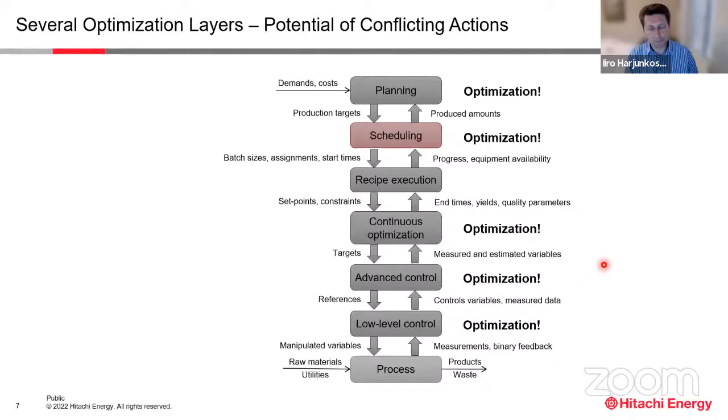At the same breath, I want to acknowledge my PhD advisor, Tapio Westerlund, from Åbo Akademi, who brought me to the world of optimization and always inspired me to try to solve more difficult problems, as well as Professor Ignacio Grossmann, who brought me really into this scheduling business and gave me more network by working with him.

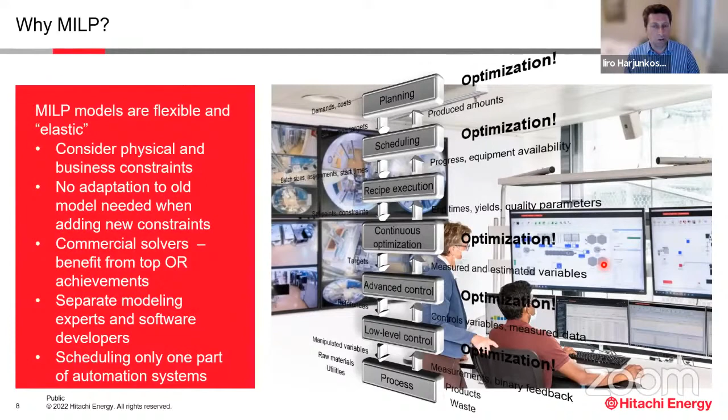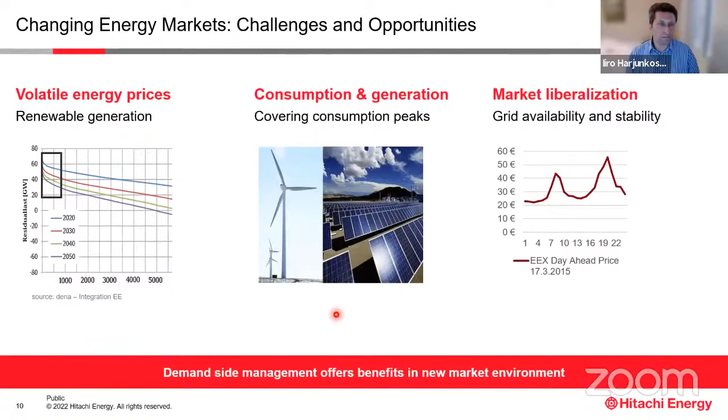So the goal of my talk will be, first of all, to highlight the importance of energy and electricity in this business, but also to give some insights into solving industrial scale scheduling problems, at least trying to solve them. I'm going to focus on demand side management, which combines process scheduling with energy and electricity scheduling. I'm going to present some strategies for speeding up large-scale optimization problems typically seen there. Then I want to share some of my personal experiences from the work I've done on melt shop scheduling and solving the unit commitment problem. One of my own beliefs is that MILP is a really important component in solving industrial scheduling problems. It's not alone sufficient, but it is one of the main topics.

So the outline of my talk will be as follows. I will first discuss why MILP. Then I will give a very short introduction on demand side management. Then we jump into the first problem, which is the steel plant scheduling problem, a continuous time formulation. Then we talk about the unit commitment problem, which is a discrete time formulation. And then I conclude.

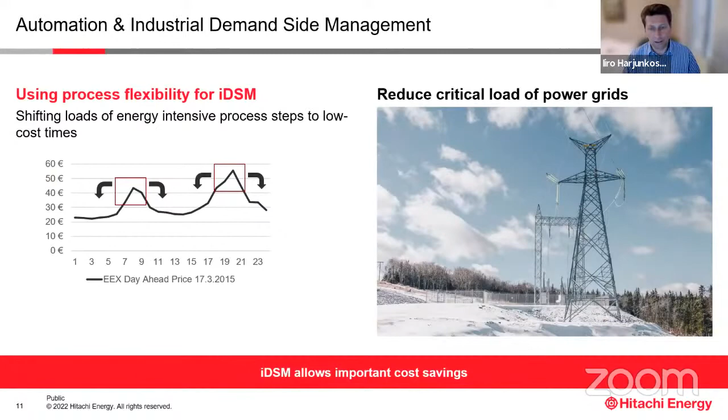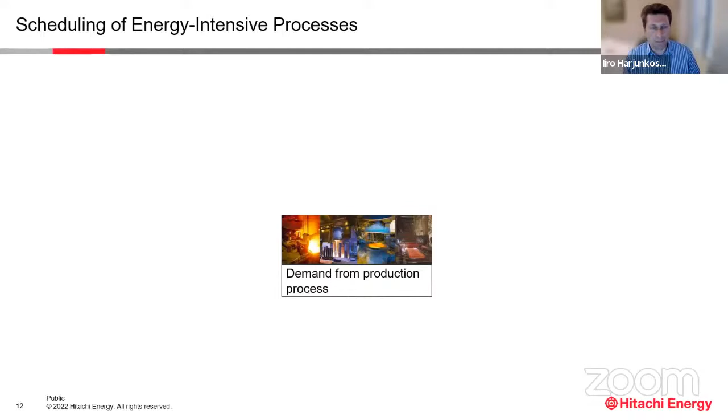So let's look at the why MIP. For instance, in this seminar series, or if you read scientific papers, we see a lot of different and excellent scheduling algorithms that could be efficiently applied to many problems. There are various policy methods, graph-based methods, TSP-based methods, constraint programming, genetic algorithms, different heuristics, approximation algorithms, and AI-based methods, and so on. So it's of course natural to question, why would we choose something like MILP, which is NP hard?

However, I'm actually in a very good position because Christian Artigues gave, a month ago, an excellent speech about MILP and scheduling. I would say he gave truly a very systematic overview with also some analytical approaches. So I'm not going to focus that much on analyzing the problems. I'm just trying to be the solver, the engineer that tries to solve tricky problems.

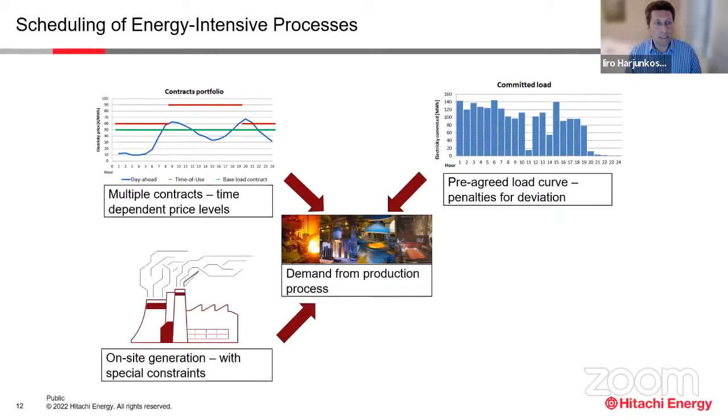Another thing is why MILP: when you look at automation systems in industries, the scheduling is only one part of it. You have the scheduling in this big chain of decision making, and a lot of these are actually using optimization. In industrial automation systems, we also have to be compatible with different layers, so we have to create compatibility at least between the neighboring sections. In this way, I would say mathematical programming is a very good way of systematizing this task of coordination.

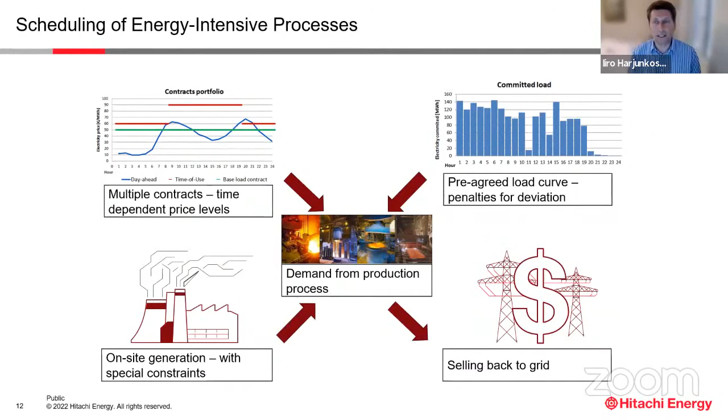Another way to see it is that MILP models are flexible and elastic. What I mean by flexible is that you can consider physical and business constraints that can be very different. Of course they have to be linear if you want to use MILP, but most of them can be linearized and at least approximated sufficiently well, and then you don't need to adapt the model. If you have an old model that is well formulated and you add new constraints, you can actually add it, and this flexibility or elasticity comes from that.

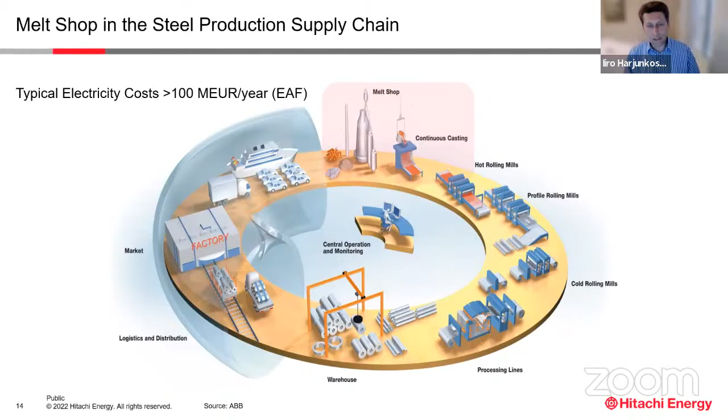Another thing that is needless to say: if you use commercial MILP solvers, you really benefit from top achievements from operations research and the best algorithms available. And with commercial solvers, you can actually also rely on them, and you can put part of the reliability and liability, as an industrial solution, on the ones who provide the solvers.

Another thing from the industrial point of view is that you can also separate the modeling expert and the software development from each other. So you can really have people who know the process and focus on the modeling, and other people who are doing software development, programming, interfaces and graphical user interfaces and these kind of things. And of course, as you see in the picture, scheduling is only one part of a big automation system. So that's another topic here.

However, in this talk, I will put on my engineering hat. I will show some cases where a concrete industrial problem is turned into math models. My focus will not go too much into how you really go about solving this. I will talk a bit about the formulation, and then I will also talk about how we go about when we have very large scale problems.

So with this, let me move to the first topic that a bit sets the stage for the industrial case: demand-side management. I will give you a very short introduction. This is a topic I have been working on myself since 2008, more or less, so it's 15 years anniversary soon. This is basically a consequence of energy supply becoming much more limited and variable once you have more renewable energy sources. This also means that when you increase the renewable generation, the prices of electricity become more volatile. You have this market liberalization that has also created a very volatile market. And that means, if you can handle it, large industrial consumers may really benefit from utilizing the flexibility they might have in their energy demand.

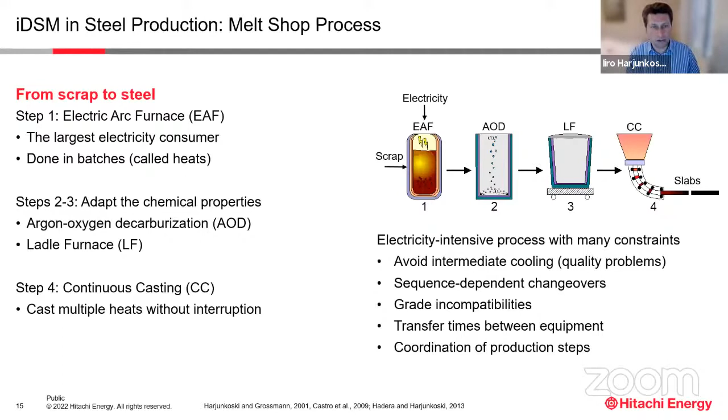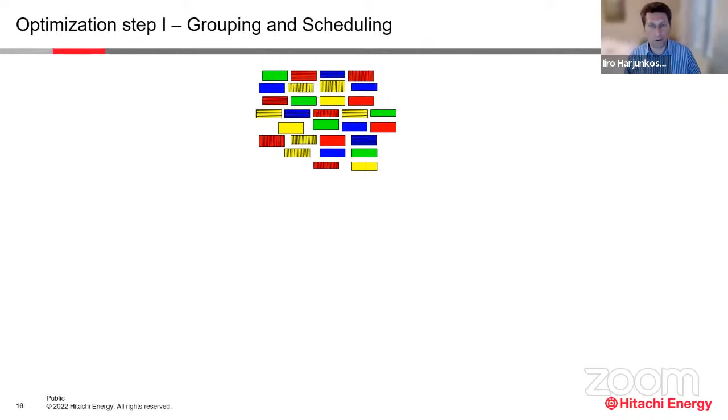And the idea is to then consume during cheaper periods. I'm going to focus more on this scenario in this talk.

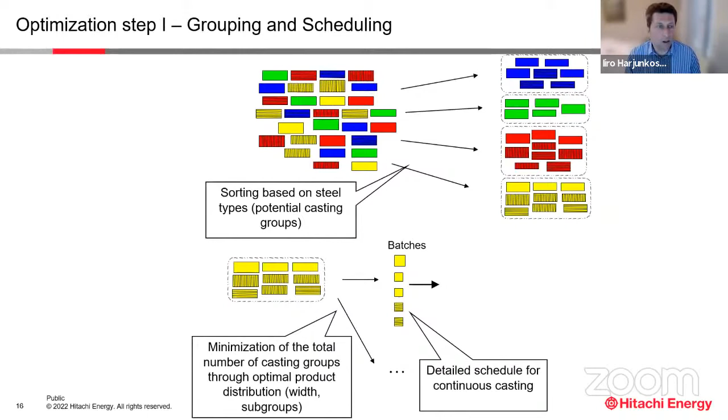Take any process that consumes a lot of energy. These energy intensive processes first have to buy their electricity from somewhere, typically through multiple contracts. Earlier, there was always this kind of base load contract done for maybe one year. Then you had time of use contracts, like night tariffs, day tariffs, weekend tariffs, but these are getting less and less common. Market liberalization has caused day-ahead markets with huge fluctuations to take over main electricity purchasing.

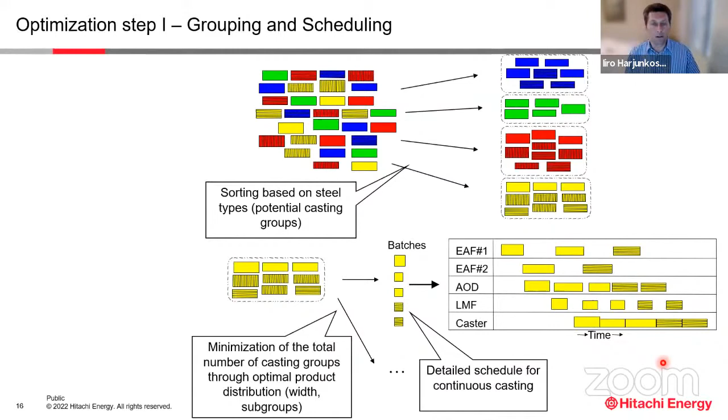So what somebody has to do is create your schedule, and then you have to guess what the price will be for the next 24 hours. You provide your electricity need and make bids, saying I will need this much energy during the next 24 hours. You try to purchase it in the best way. Once confirmed, you have a commitment, a committed load, and if you deviate from it, you have to pay penalties.

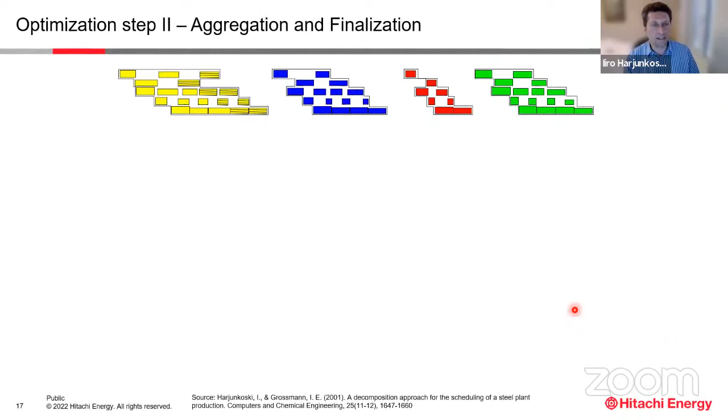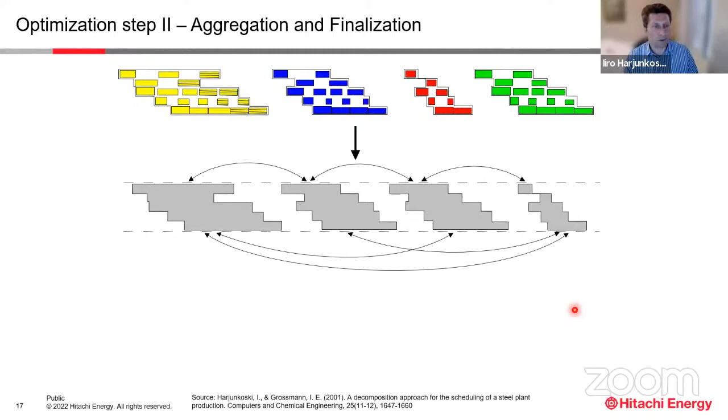There's also on-site generation. Some plants have it, not everybody, which has its own constraints you have to take into account. If you have too much energy, for instance you deviate from your plan in a negative way, it may be that you can even sell it back to the grid. But this gets a bit more tricky.

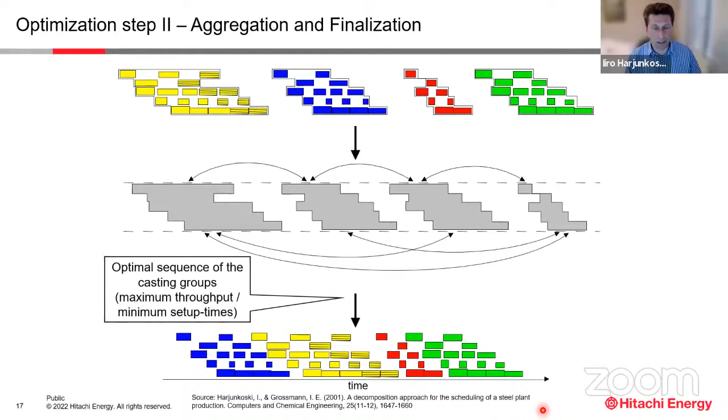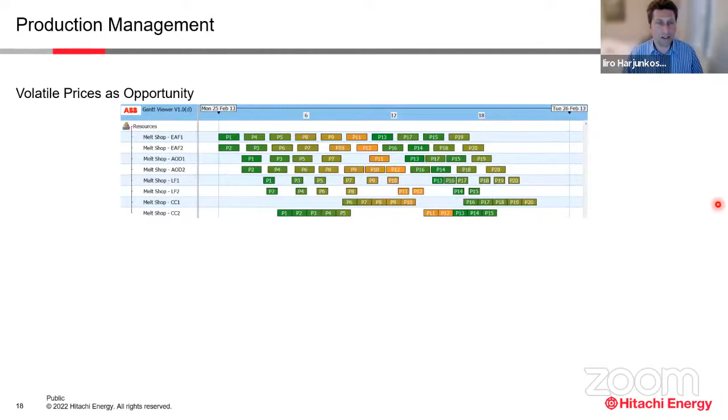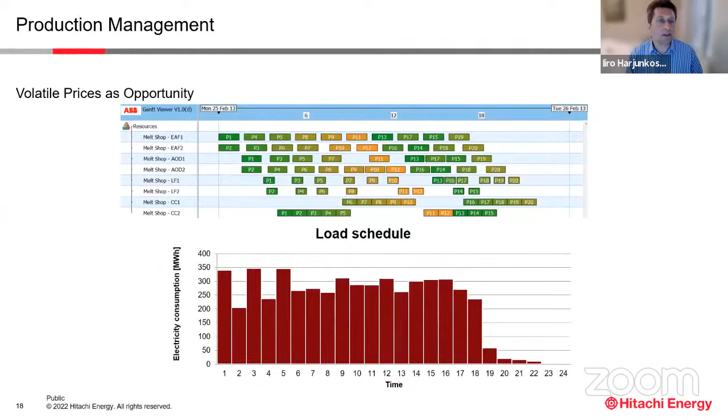The focus in this talk will be on this melt shop, where we melt scrap and iron ore to produce steel, which we then cast in a continuous casting unit and further refine into different products. Now let's look at the process in a bit more detail.

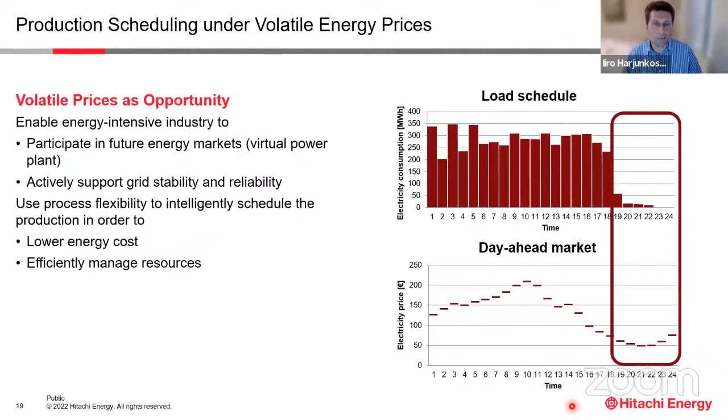The first step is to smelt or melt the scrap you get. It's done in an electric arc furnace, and this is a huge consumer, typically consuming between 70 to 150 megawatts. It's the largest electricity consumer in these kinds of steel plants. This is done in batches: you fill it with scrap a couple of times, then run the electrodes to melt the scrap. Once done, you have a full set, maybe 100 tons or more of molten metal, which you hand over to the next step, the argon oxygen decarburization unit.

We blow in a mixture of argon and oxygen to get rid of the carbon, and this produces steel. The third phase, the batch goes over to the ladle furnace. In this step, you typically add some chemistry, some chemicals, to create a certain steel grade, like chromium for instance. Then you adjust the temperature so it's perfect for the next step, which is critical: continuous casting.

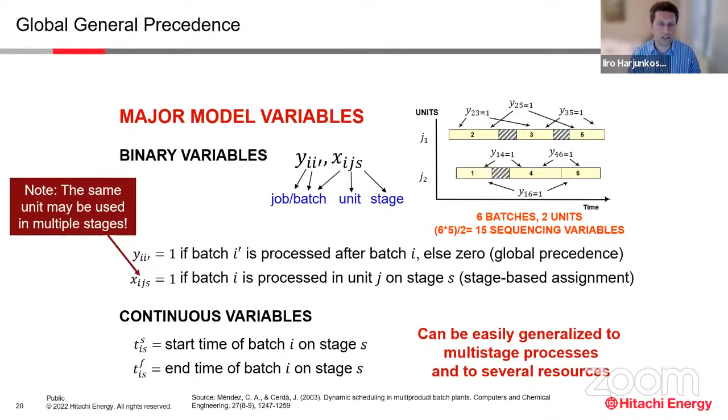It's called continuous casting because it should cast multiple heats or batches, called heats in the steel world, without interruption. That means when my previous batch is slowly emptying, you should already have the next batch ready to pour into this tundish so the continuous caster never goes dry, otherwise you have a lot of maintenance to do.

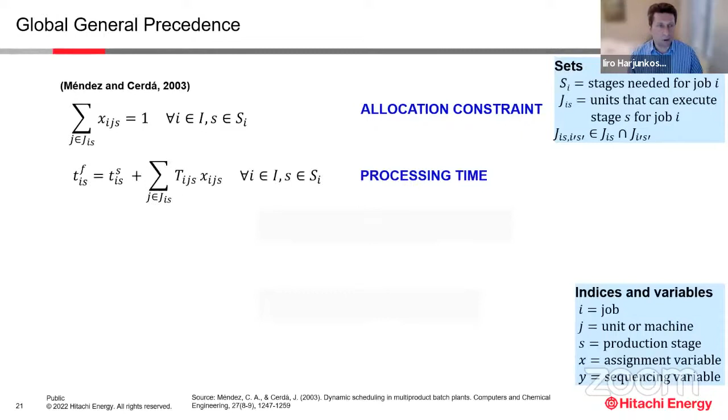So this is the process, and it's an electricity intensive process with many, many constraints. For instance, one constraint is you should avoid intermediate cooling - if a heat stays too long between stations, it can cool down, causing crystallization and quality problems. You also have a lot of sequence dependencies in these changeovers, and grading compatibility requirements.

Some grades simply cannot be put into the same continuous casting sequence. You also have transfer times between equipment that depend a lot on your layout and assignments of equipment, and then the normal coordination of production steps as in any scheduling problem. So how do we solve this problem?

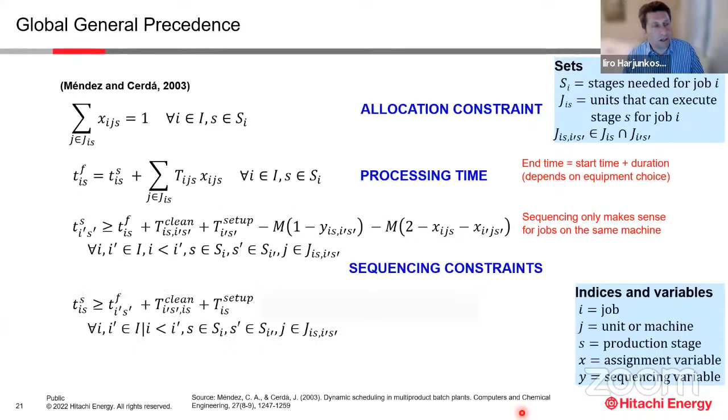It's quite complex. This was something I did with Professor Grossmann back in 2000 during my postdoc. We made an algorithm where you have different steel grades. Here a color represents a grade, and the dashes represent a subgrade, meaning it has similar characteristics and can be cast together, but there are rules about the order sequence. You can also see different widths of these boxes, meaning you're casting different slab types, where geometry also plays a role.

So the first step is simply sorting. First, take them out and sort them so you have potentially compatible grades together, and these grades from one of these groups could form a potential casting sequence.

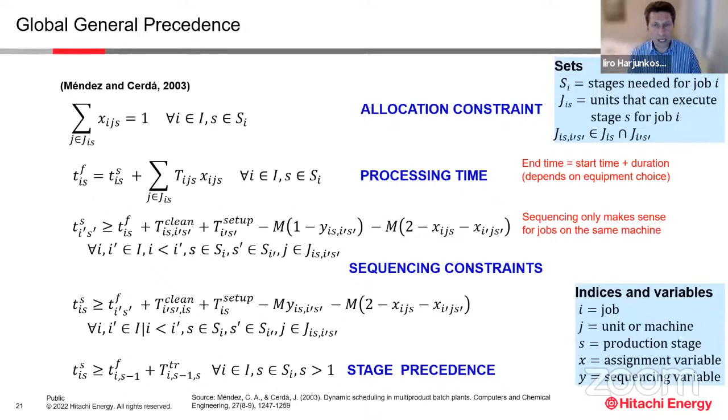Then you solve a first MILP problem. You take each of these groups and solve an MILP problem where you try to minimize the number of casting sequences needed to process all of these. There's also an upper limit for how many heats or batches you can do in a sequence, which varies between 3 and 8, typically depending on the steel grade.

After formulating the sequence with this first MILP problem, you do the standard continuous time scheduling formulation with fixed sequencing. Here the continuous casting is respected in the schedule, and all the other operations are aligned so the next heat is always ready by the time the earlier heat has been cast. The ladle furnace here actually acts as a buffer to keep it warm for some time.

So what you get are partial schedules, and a lot of them. Typically for a week you may have 80 to 100 heats, so you get many of these schedules done. Then you need to think about how to put these together. So you have another MILP problem trying to figure out the perfect order of these, using a kind of slot-based approach.

Finally, once you define it, you can solve an LP relaxation to get the air out and make it a bit more tight, or you can also use MILP to possibly change some assignments to get a more tight schedule.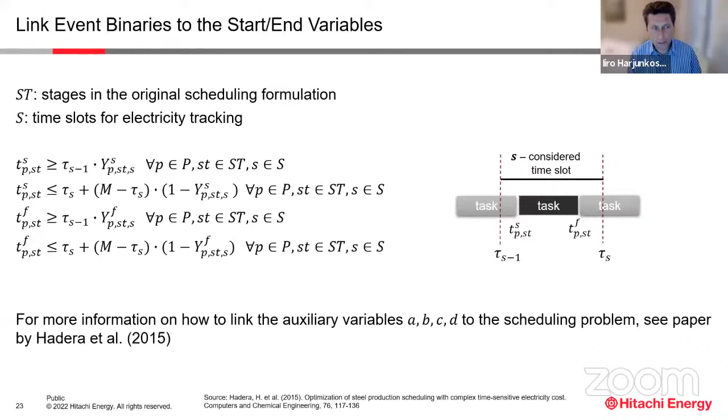If you can actually take into account this electricity price, that should give you a good opportunity. Since this is a continuous time problem, we decided to use a global general precedence as a starting point. This is a scheduling MILP formulation by Méndez and Cerdá from 2003. Basically what they do is have separated binary sequencing variables Y, and this is global, applying for all instances of batch I and I prime.

So if batch I comes before I prime, we have an assignment variable which tells us in which unit J my batch I should be processed at stage S. We include the stage S for generality, because in some cases the unit may be used in multiple stages. Then you have two continuous variables: one is the starting time of a batch on a stage, and the second is the finish time of the batch at that stage. So this is a quite general approach.

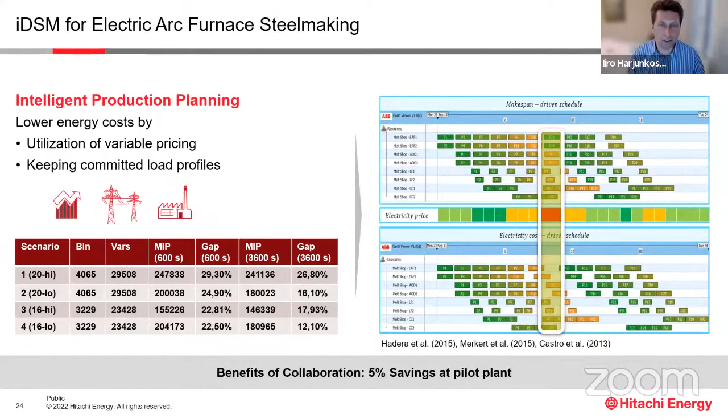This duration could also be a variable, and that was one criteria here, because in the steel example we needed to handle a variable processing time for some units, for instance a ladle furnace, to make sure we can keep it there longer if it has to wait for the casting.

Then we have sequencing variables and sequencing constraints involving the starting time. If I comes before I prime, we say that the starting time of I prime is after the finishing time of I, plus the cleaning and setup times. And since we're talking about scheduling, we have to add this kind of big-M constraints, or use another way to formulate it.

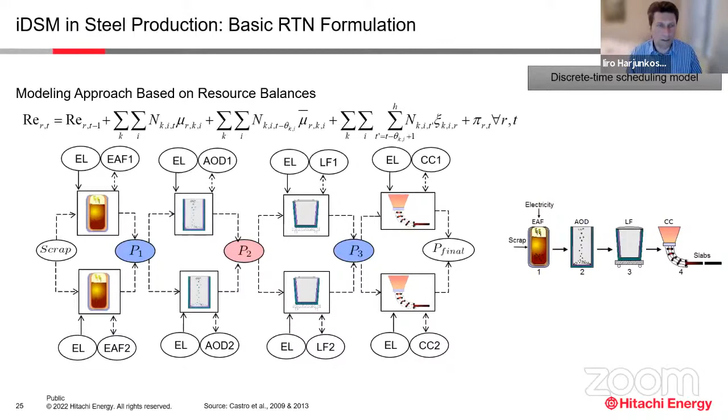First, we relax it if the sequencing variable is true and active, but also if I and I prime are not assigned to the same equipment, it doesn't make sense to make this constraint active. Then, the same way but the other way around, if I prime comes before I, we have the same constraint, just reversed. Finally, we have a transfer time considered between stages.

So for stage precedence, we have to say that the previous stage has to finish, plus a certain transfer time, before the next stage can begin. This transfer time can also heavily depend on the unit assignment you've selected. So that's basically just a simplified plain formulation.

One part now is how we get this energy awareness put into the formulation. There are alternative formulations, but somehow you have to be able to account for the electricity consumption. So our math model basically becomes: production scheduling constraints, plus energy awareness constraints, which I will discuss here.

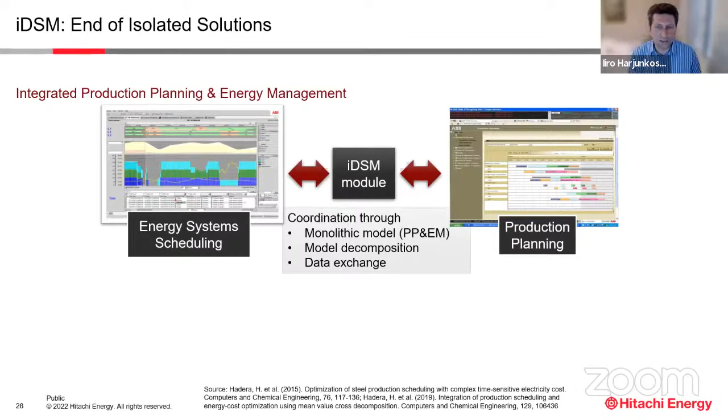You also may have price response, and you have to be able to, in the objective function, understand the penalties for pricing and deviations from committed loads.

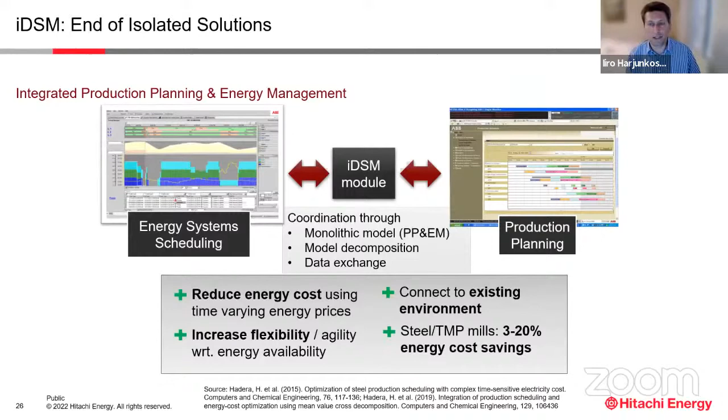Here's an electricity price for this time slot. Then we have time slot 2 with a different price, E2. And time slot 3 has yet a different price.

Now we have to understand how to track this consumption, and the paper by Nolde and Morari from 2010 had this very good idea of tracking it using, I think, 4 or 6 binary variables. So you can calculate that if, for instance, a task starts and finishes within a time slot, then the consumption within that time slot is equal to the duration of the task, and so on.

I won't have time to go through all of this, but to combine these time slots we need some kind of event binaries. So what we did is define two binary variables which basically indicate whether my batch is starting or finishing in a given time slot.

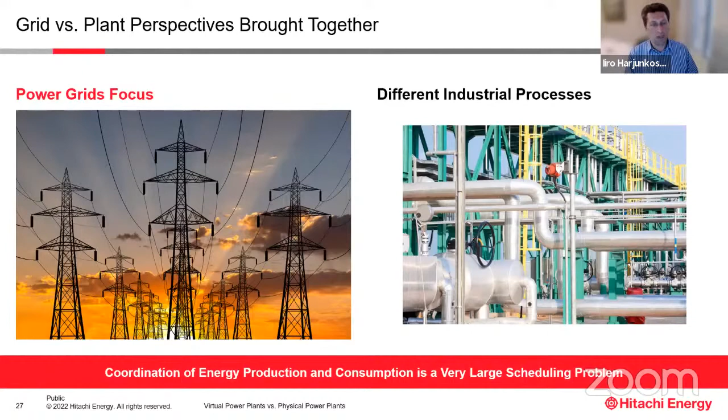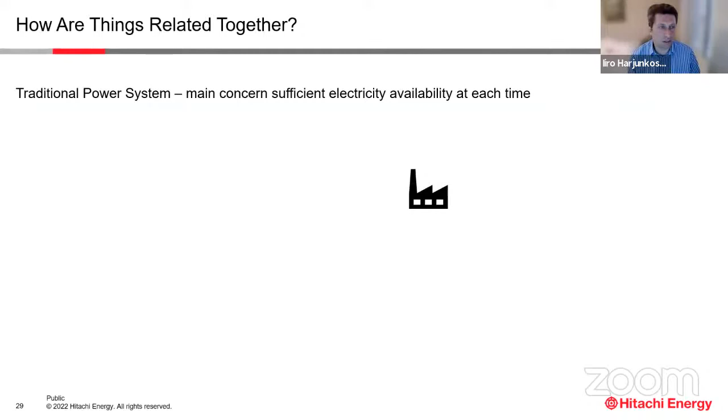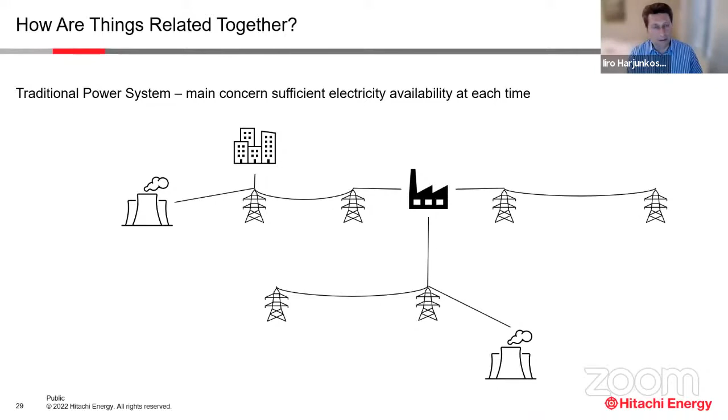This is the start time of a stage in the process in the previous scheduling model, and then you have the start and end time of your electricity slots. This is basically a simplified version, and more details can be found in the publication of Hadera et al. from 2015. This is the way we could formulate the problem. I realized there's probably a lot that could be made much tighter, for instance using convex hull reformulations, but already this one turned out to be working.

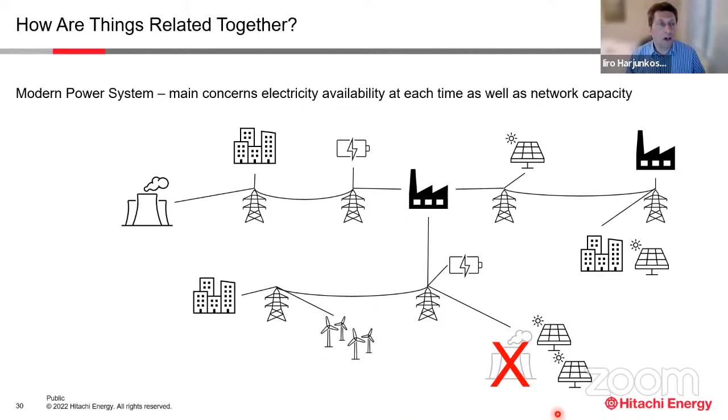So in this case, you can see some results. We took 20 heats and 16 heats in different scenarios. Here we have high prices, here we have low prices, and we get 4,000, 3,000 binary variables, and this is what you get. You can see there's an integer gap of about 20% after 10 minutes of scheduling time, and even after 1 hour of scheduling time, we couldn't reach even close to 0 gap. However, the solution is not far from optimal, but we cannot prove optimality, even if it were the optimal solution, and this still remains a challenge.

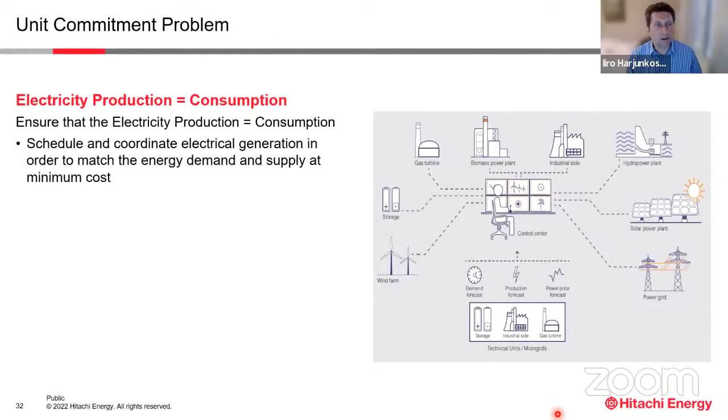However, one of the main targets of this study was to prove whether there exists such flexibility in this process that could be used for demand-side management. Here in the middle of this Gantt chart you have the electricity price - red is expensive, green is cheaper. Compared to the original make-span-driven schedule up here, in the electricity cost-driven schedule you can see that we avoid using the highest intensive cost times for our electric arc furnaces, which are the biggest consumers. We could actually see that collaborative models could save 5% at a pilot plant.

So you can see it's not perfect. We also tried different approaches - we looked into the resource task network approach, both continuous time and discrete time approaches. But as the changeovers here play a really big role, this was difficult because that needs additional tasks, and equipment selection also affects the duration and transportation distances. So that was one thing that spoke against the discrete time model.

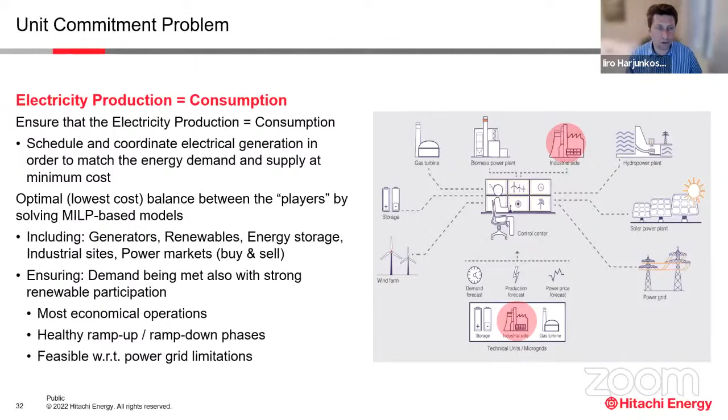In practice, when we talked to the steel plant, they need maximum 5-minute time granularity. So we have to have at least 5-minute exactness, which would make a discrete time approach very, very big. So even though we could prove the discrete time model was actually more efficient, it wasn't that practical. It could solve certain problems, but in this case it was not so good for this problem. However, for some continuous problems, we could show there were a lot of benefits to using this RTN approach.

So then we also tried more - what else could we do? This was not yet sufficient. We could see a clear trade-off between the two partly contradictory goals of minimizing energy cost and minimizing the make span. So we thought, could you actually make some kind of industrial demand side management module? We tried some bi-level heuristics that try to balance between the two targets. We also developed some mean value cross decomposition approaches using Benders and Dantzig-Wolfe decomposition. Here you have the papers.

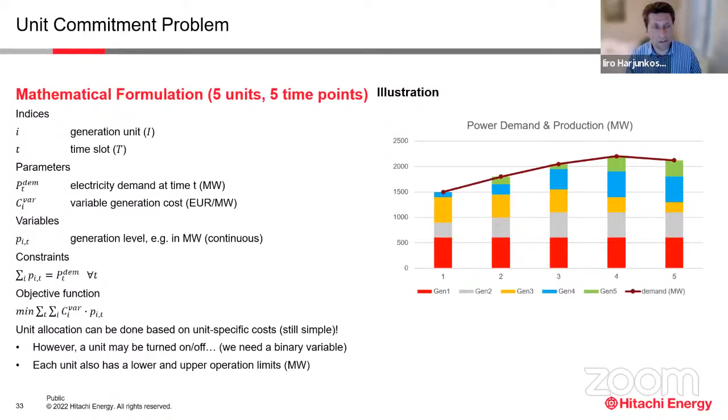We also looked into game theory to try to find good solutions fast, for instance trying to coordinate using Stackelberg games and even multi-parametric programming by Pistikopoulos et al. This didn't fully solve it, but we could find nice solutions. We could see that you can reduce energy costs significantly with this type of approach, and increase the flexibility and agility of your complex processes. We could prove that you can actually reach 3 to 20% energy cost savings, but still the solution time was somewhat an issue. So this is one story of hitting our heads together with industrial demand side management in steel.

And now I would like to change the tone a bit, because why do we do demand side management in the first place? This all eventually comes together because power grids have to deal with balancing energy demand and supply every second of the day. Demand side management creates an opportunity to see these processes from the grid point of view as a virtual power plant. That means if you reduce your consumption, you release energy or reduce your energy request, which can be seen as a virtual power plant. And that means you can also look at the process on the right-hand side as a prosumer - producer and consumer.

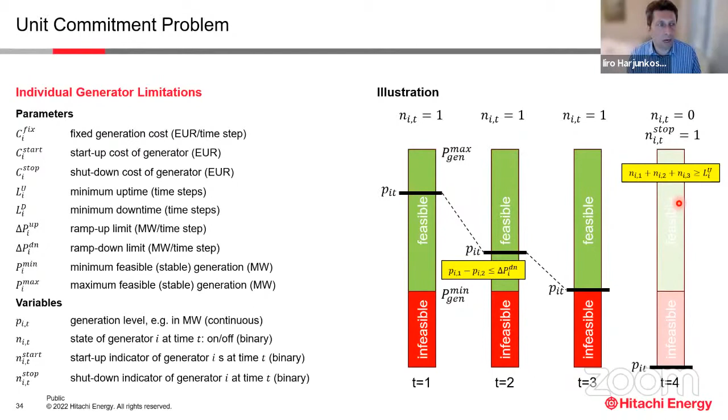Coordination of this energy production and energy consumption is a very large scheduling problem. I believe this collaboration should be brought closer together. However, these are completely two different worlds, and we cannot see the details of each other.

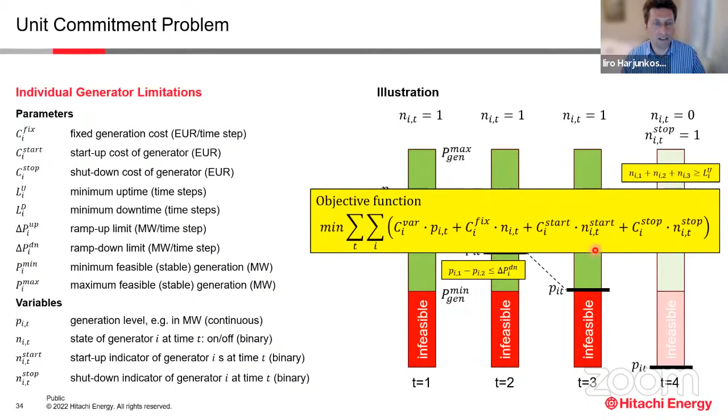On the one hand, you have all these process related important things that could ruin your production. On the other hand, the grid is huge. It can be a countrywide grid, and you may have issues in a completely different region that depend on your actions taken in one place.

I made this simple picture to highlight how these things are related. Here we have our steel plant alone. In a traditional power system, our steel plant was there, connected by a couple of lines to the grid, and big power plants would then produce sufficient energy for the plant. These grids were dimensioned such that they could handle it together.

Today, the modern power system has a lot of different concerns because big power plants are replaced by these smaller renewables. So you will have a lot more distributed energy generation, and it's also not always at hand.

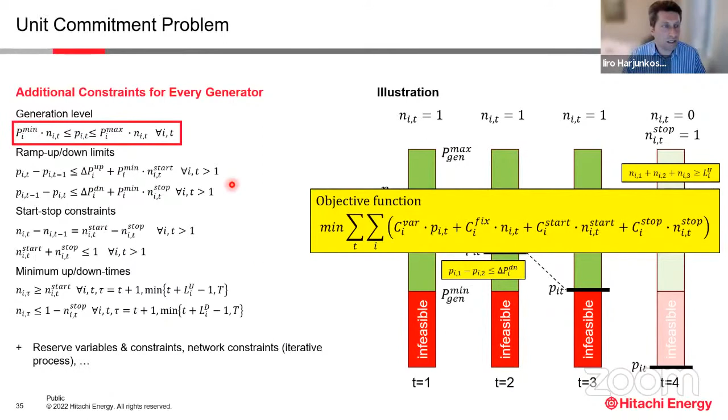So the TSO, or the transmission system operator, has to really concern themselves not only with electricity availability, but also network capacity. Does he have enough grid capacity to let that much electricity through, because there are also new communities coming up and new industrial sites built, and we have this uncertainty here.

So we go back now a bit to the grid provider view, and we look at the unit commitment problem, which is a discrete time scheduling problem. Basically, the main topic here is just to ensure that electricity production is equal to electricity consumption in my grid.

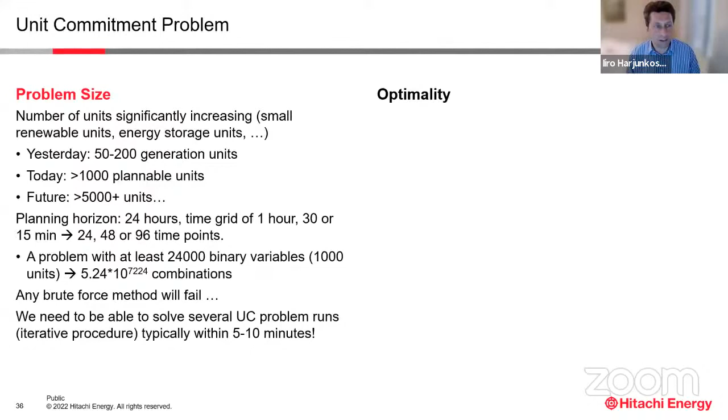It's basically a scheduling coordination problem, where you have to match energy demand and supply at minimum cost. You try to optimize this by balancing all these players - industrial sites, power plants, energy storage, and all of those - and you also have to take into account the power grid and its possible limitations. You have to ensure the most economical operations, because this will in the end reflect the electricity price that affects everybody.

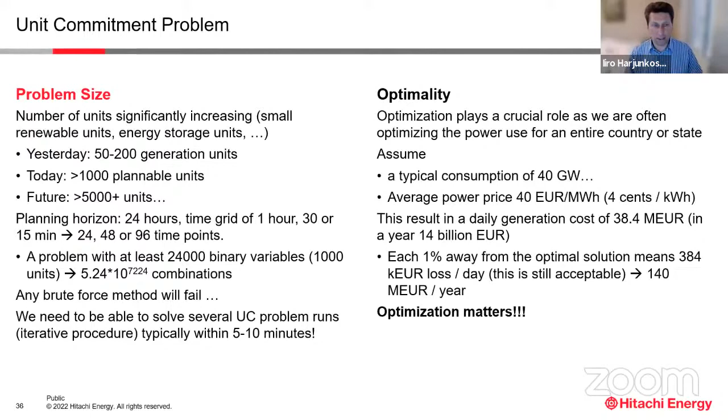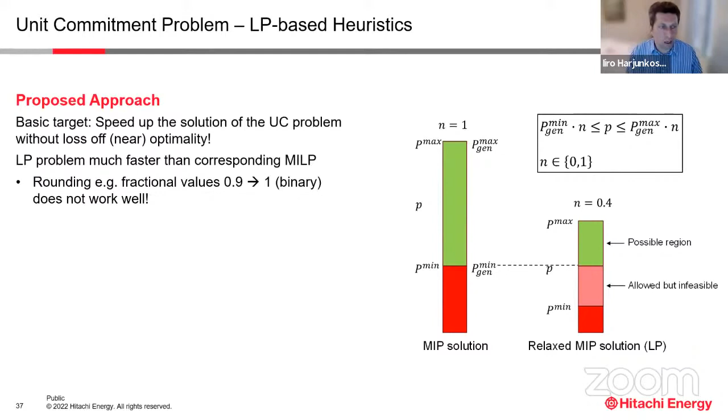The objective function would be to minimize the variable cost. But of course, it's more complex because the unit should also be able to turn off. So we don't only have continuous variables, we need binary variables, and we get these additional parameters when you look at the entire problem.

So say this is my generation unit, and typically it has a stable minimum and stable maximum generation point. That means that if I have a power plant of 500 megawatt capacity, I cannot run it normally with 5 megawatts stably. So I have some min and max values.

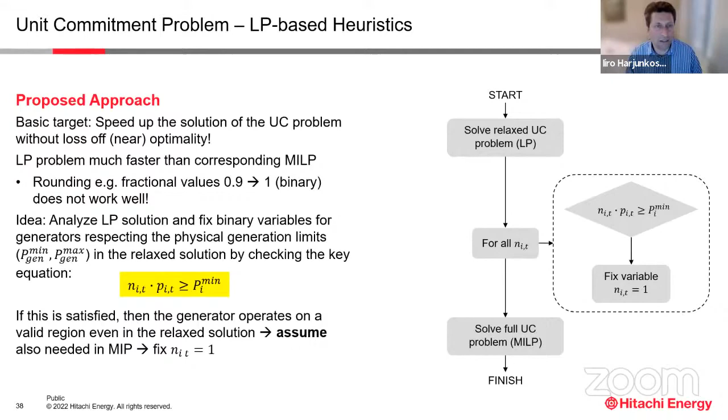So if I want to schedule this unit to run here, it should be between a P max and P min. And then that means I also have to track if my unit is on, the state of my generation unit - then this on/off variable here would go on.

That would be equal to 1 if my power unit is producing. And the same goes, I also have some startup and stop indicators.

So let me say I then want to ramp down. So for time point 2, I take this production down. And then if I do that, it's still on, but now I have to make sure that the difference between these 2 points is not bigger than my ramp down limit.

And then I go down, maybe I take it to the minimum level, after which I can shut it down, turn it off. In that case, the n variable, the binary variable, goes to 0, but we have this start and shut down indicators, so the stop indicator goes to 1.

And here, when I do this, I also have to make sure that my energy generation unit has been on enough of times. It has to meet the minimum uptime constraint, as well as, if you then shut it down, it has to meet the minimum downtime constraint as well.

And the objective function typically is, you minimize variable cost depending on the generation level, plus fixed cost of having a unit on, plus then starting and stopping costs.

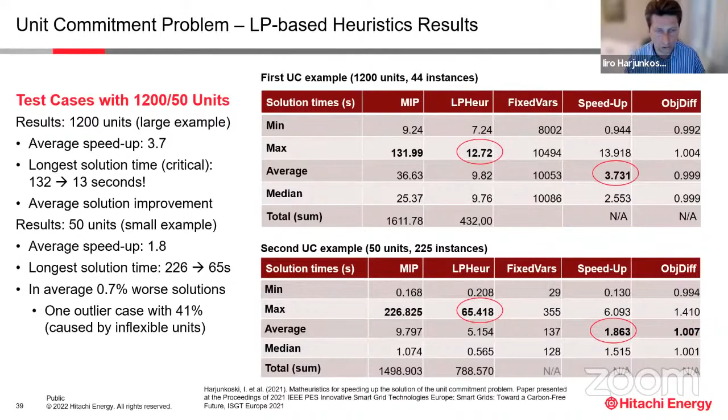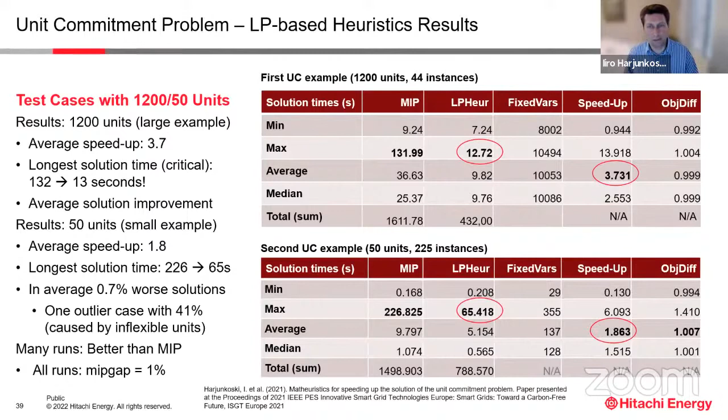You have some start and stop constraints that relate n with the start and stop indicators. And then you have this minimum up and down time constraint. This is one example of it. There are many examples of how to formulate those.

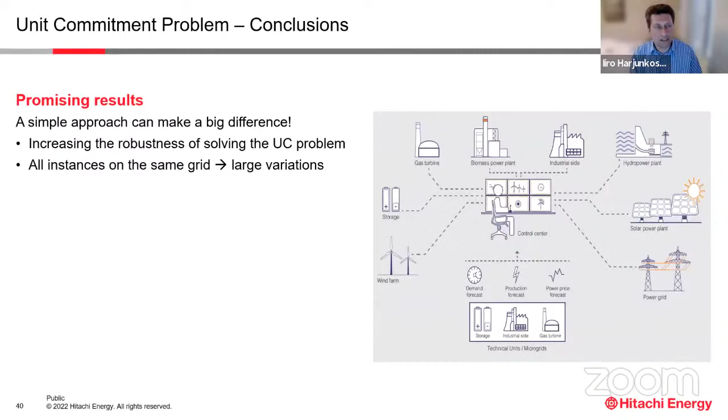And then you are basically much more constrained, I don't have time to go through reserve. You have to account for some uncertainty in the demand and production and make sure that you have enough reserves in place. So you have variables and constraints for that.

You also have network constraints, which you normally take care of by iteratively solving this MILP repeatedly. So this is going to be one of the key constraints in this talk.

So if you look at the problem size, first of all, this is a fairly large problem. We have number of units increasing with this energy revolution that is happening. Yesterday, we might have had 50 to 200 generation units. Today, we already talk about more than 1,000 plannable units that you have to plan in. And tomorrow, probably we'll have much more than 5,000 units.

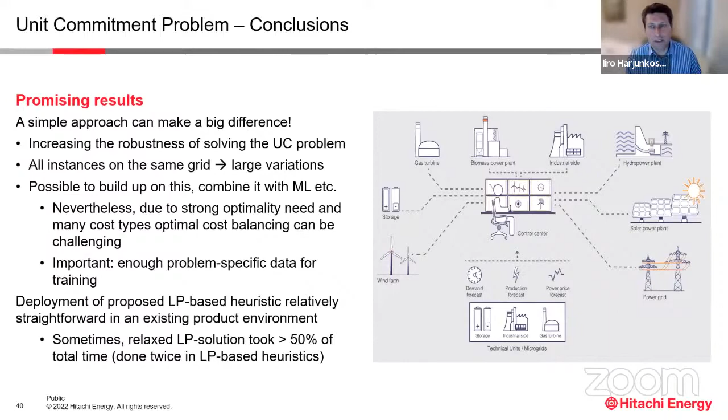So that means if you take a planning horizon over 1 day, and your time grid is often 1 hour, or maybe 30 minutes, even sometimes 15 minutes, you get 24 time points for a 1 hour grid. And if you have a problem with 1,000 units, you get at least 24,000 binary variables for that. And plus, if you also consider the binary variables for starting and stopping, it even goes higher.

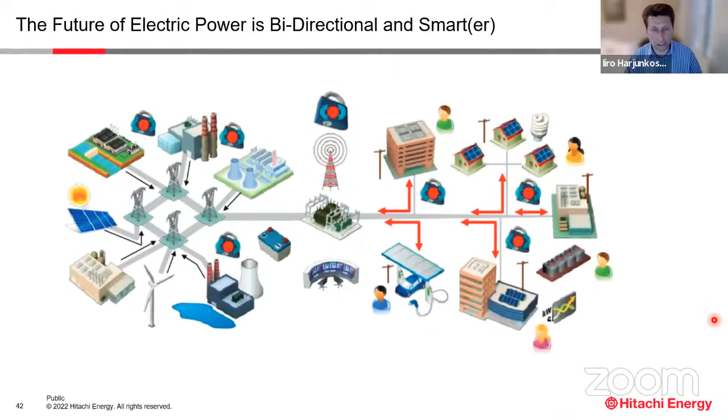So, brute force method will fail. So we need to be able to solve this unit commitment problem, which runs iteratively. Typically, we have to solve maybe 3 to 6 or 7 runs within 5 to 10 minutes. So it's really important to get it fast.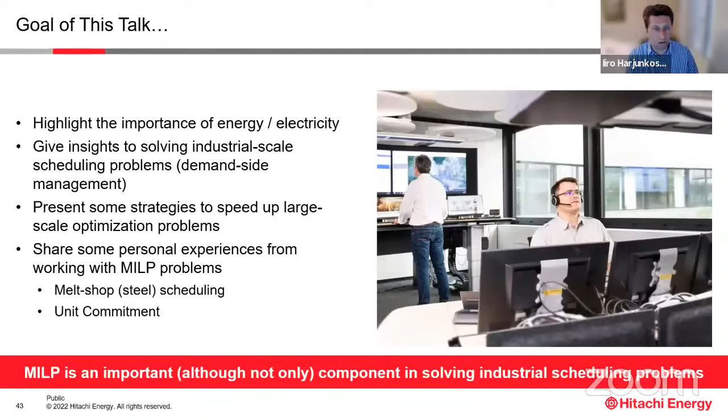Optimization again plays a huge role here because we are often optimizing an entire country or a big state. Typically consumption could be 40 gigawatts. And if you take an average price of 40 euros per megawatt, which sounds like a dream in today's world, this results in a daily generation cost of about 38 million euro. And annually we talk about 14 billion euro.

So if you think about optimality, every percent away from the optimal solution would mean a loss of 380,000 euro, which would be 140 million euro per year. And this is still acceptable, typically you'd use an optimality criteria of 1%. But here optimization truly matters.

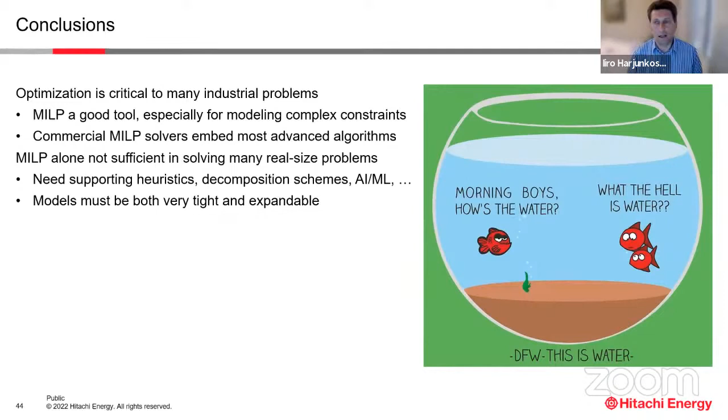So what we did here, we tried to speed it up using an LP heuristic, which is a very simple one. The basic target would be to try to speed up the solution of the UC MIP problem without losing on optimality. There's a lot of literature about how you use rounding, you solve the LP and round values, but this doesn't work so well because it quite often results in infeasibilities.

The idea is, if we satisfy this constraint, then it's fair to assume that if it's needed in the relaxed solution, it would probably also be needed in the full MIP solution. So we assume it will be needed and fix the variable to 1. We solve the LP for all these binary variables, check the constraint, and if it's true, we fix the variables, then solve the full MIP problem with partially fixed binary variables. This could be done in several passes.

So now I will just show the results. We tested this with one example. There were 44 different instances of the same problem with 1,200 units.

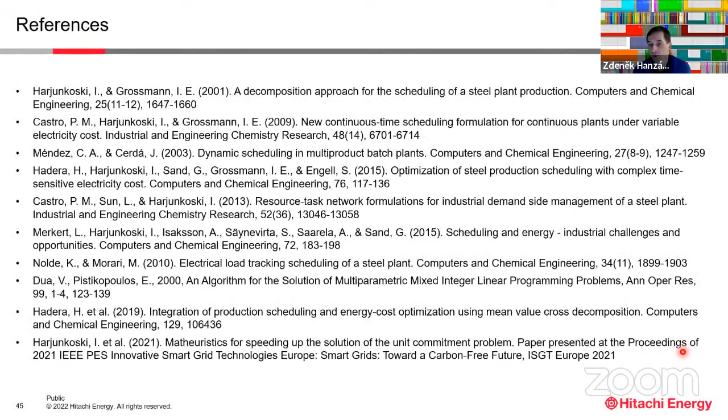Optimization is critical to many industrial problems. And commercial MILP solvers also can embed a lot of advanced algorithms outside the branch and cut itself, with all the pre-processing and heuristics that they have built in. But MILP alone, even if you use these commercial solvers, they cannot do all the job for you. So you need some supporting heuristics.

You need to use decomposition schemes. You need somehow to support this kind of approaches. And apart from that, your model should be very tight and expandable. So this is one important topic that applies, of course, to any optimization problem.

And then energy combines really these different players that don't know about each other's worlds. So demand-side management is one way of trying to seek and identify the flexibility in your process. And then in general, combining the scheduling of processes and scheduling of the energy is really hard, but it's necessary. If you look at the future scenarios, this is really necessary. So we really need to have more solutions that are crossing these domain borders.

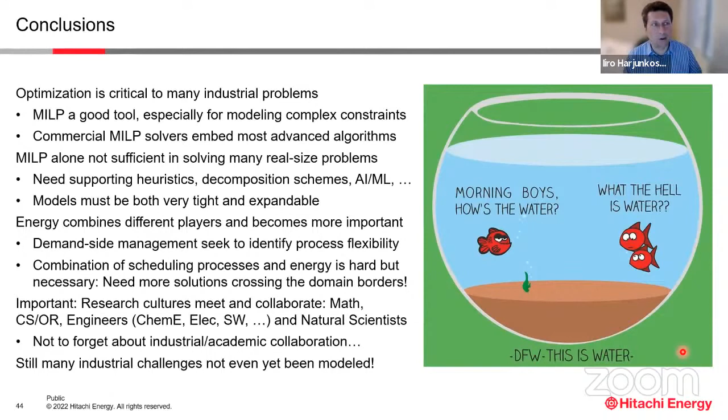And here it's important that research cultures meet and collaborate. So mathematicians, computer scientists, OR people, together with different disciplines of engineers, and myself a chemical engineer, but also electrical engineers, software engineers are needed, as well as the people who really understand the physics and chemistry behind these different processes and phenomena. Of course, not to forget about industrial and academic collaboration.

I have also spent quite a bit of time in my work trying to bring academia and industry closer to each other and raise some new problems and interest on certain topics. And still, I have to say that there's still a lot of industrial challenges that could be optimized, but have not yet even been modeled, because partly of the complexity and partly maybe the time and priority.

So that would end my talk. I would like to maybe highlight a few references that I have been talking about, for those who are more interested. And with this, I would like to thank you, and I'm happy to take any questions. Okay, thank you very much.

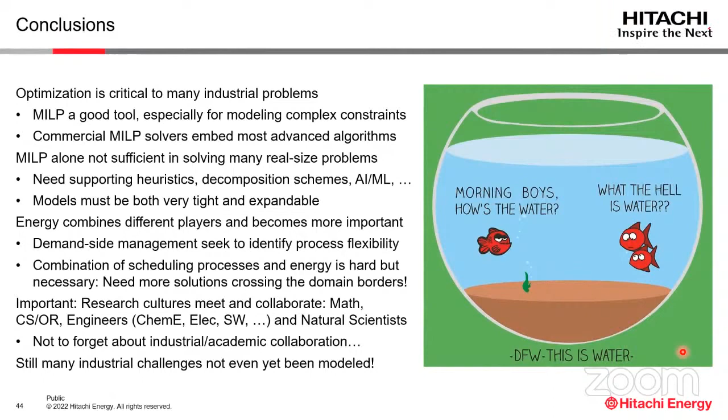As far as I know, in Czech Republic, they do kind of groups of those production resources that will be marketed together. For example, if there are classical producers, they have just one group, but if there will be small producers, they will probably be part of some consortia which will run optimization algorithms for them to sell it at the best price, or to be activated at certain moments when the price is good.

So definitely it's more of a distributed problem. Up to now we have handled these problems by centralized solutions. So what is your outlook to that? What do you think may change if it will be really distributed?

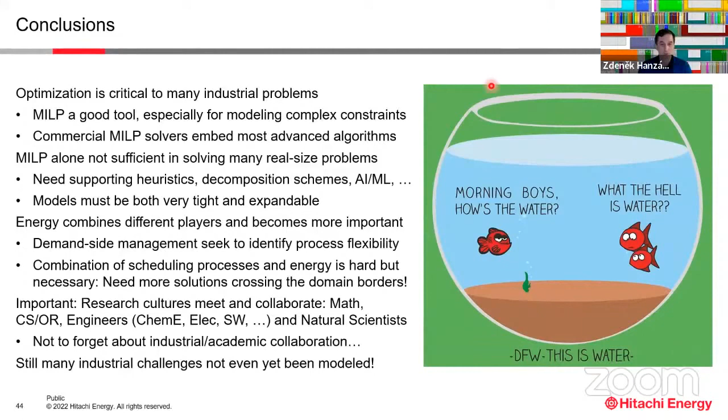Yeah, this is a very good and challenging question. I mean, you have this kind of, especially many small solar and wind power plants merging to become a bigger plant as well. That's very good to understand. But also there's these virtual power plants where basically also your battery storage is related. So you try to have, I would say, more stable units by forming something together. So that's, I would say, a healthy development.

And in the end, I think what you need to do is, first of all, you have to have something that coordinates maybe an aggregated level. So it has maybe 50 or 100 units aggregated to one big unit. But then somebody, of course, has to coordinate the big game when it comes to grids. One of the keys there, if you have different industries, they have to also internally increase their optimization skills, because many industries are today scheduled manually.

If you use manual methods, it's almost close to impossible to create the flexibility that you might need in this kind of demand side management, where you want to act as a virtual power plant, avoid big costs, and support the stability of the entire electricity system. So it's a challenge.

I believe maybe at least a simple solution could be a control-related solution that provides some kind of short-term flexibility, where you define some buffers that you could then aggregate to something bigger. That could be something that would be there.